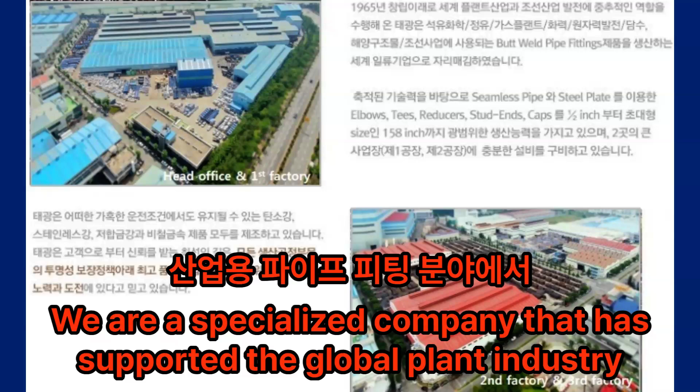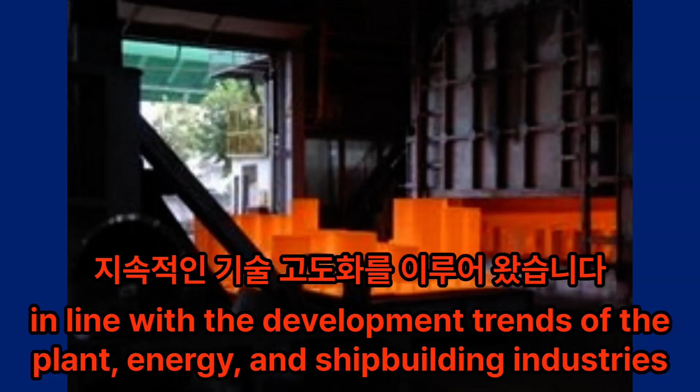We are a specialized company that has supported the global plant industry based on the world's largest production infrastructure and proven manufacturing technology in the industrial pipe fitting sector. Since its establishment in 1965, Taekwang has continuously advanced its technology centered around butt weld pipe fittings, a core component of piping systems, in line with the development trends of the plant, energy, and shipbuilding industries.

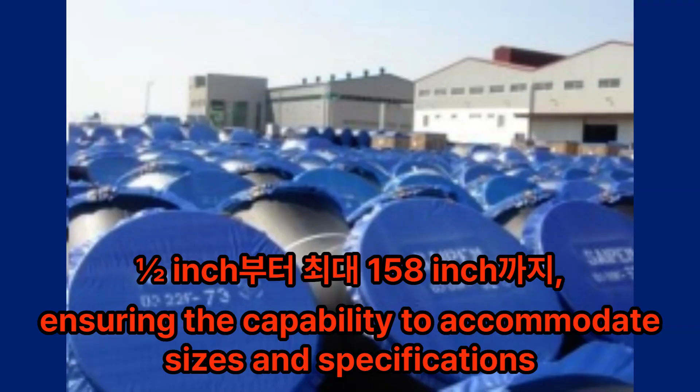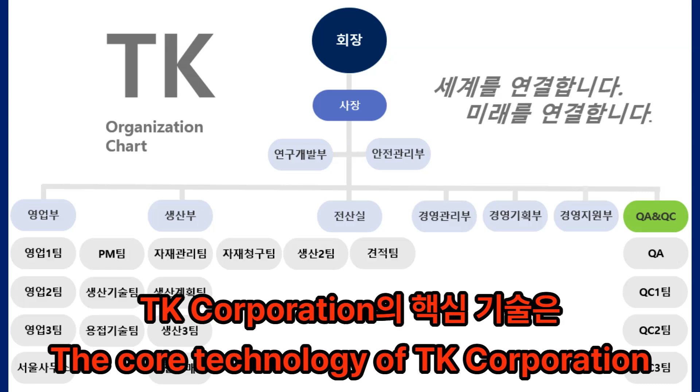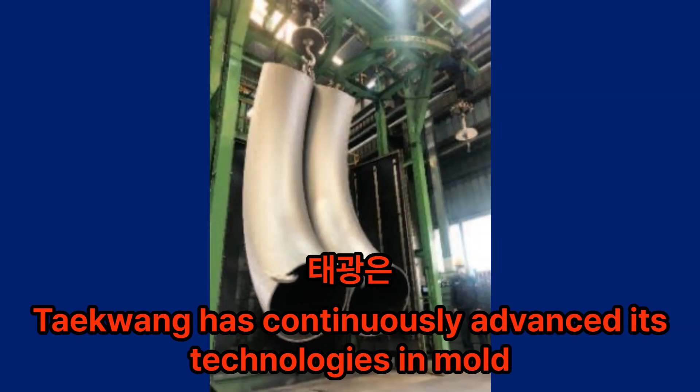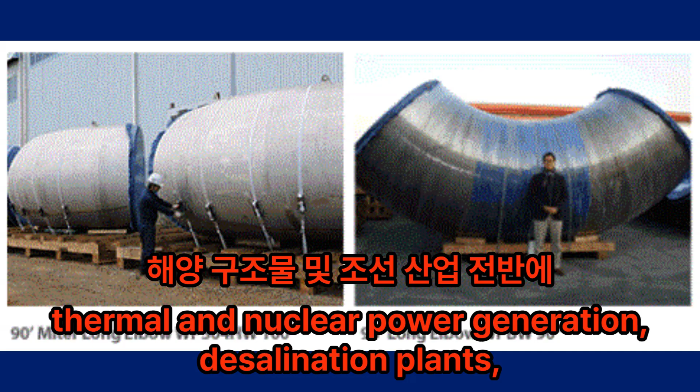This structure simultaneously meets the specification, consistency, and quality stability required in large plants and mega projects. The core technology of TK Corporation is the manufacturing technology for extra-large fittings. To respond to the trend of large-scale and high pressure in the plant industry, Taekwang has continuously advanced its technologies in mold, forming, welding, heat treatment, and dimensional control, establishing a product portfolio applicable to petrochemical refining gas plants, thermal and nuclear power generation, desalination plants, offshore structures, and the shipbuilding industry as a whole.

TK Corporation possesses the capability to handle design, manufacturing, and verification in a one-stop manner in the fields of segmentable elbow, induction bend, and barred T.

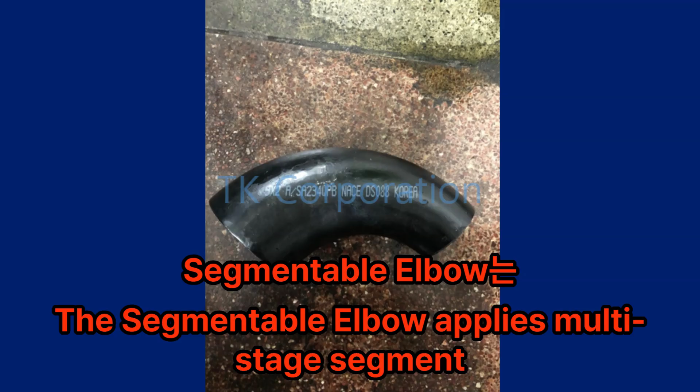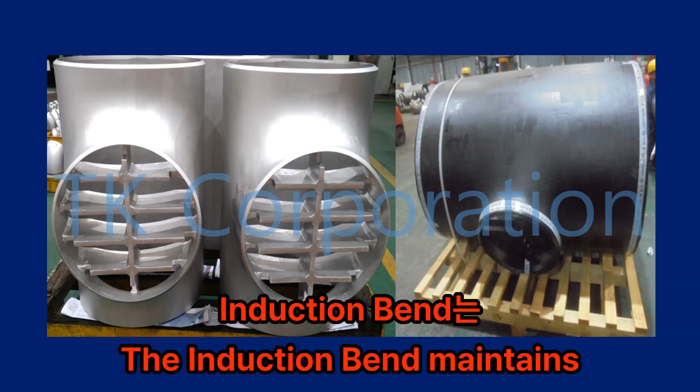The segmentable elbow applies multi-stage segment design and welding technology to ensure the curvature, precision, and structural stability required for large-diameter pipelines. The induction bend maintains uniformity and durability of material properties based on high-temperature induction heating processes and is applicable across all segments of upstream, midstream, and downstream.

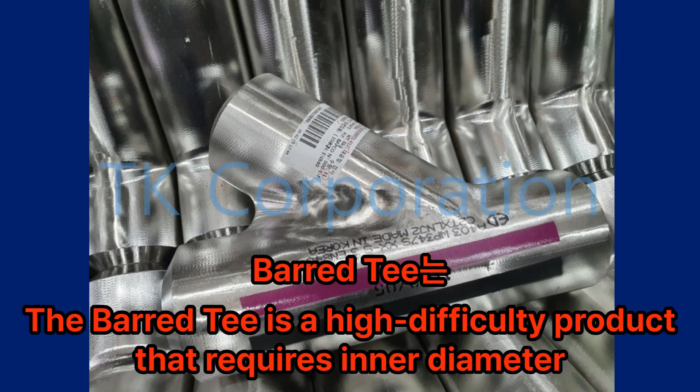The barred Tee is a high-difficulty product that requires inner diameter control and structural reinforcement design, considering intelligent pig operations, and it is custom designed to meet customer conditions based on international pressure, vessel, and piping codes.

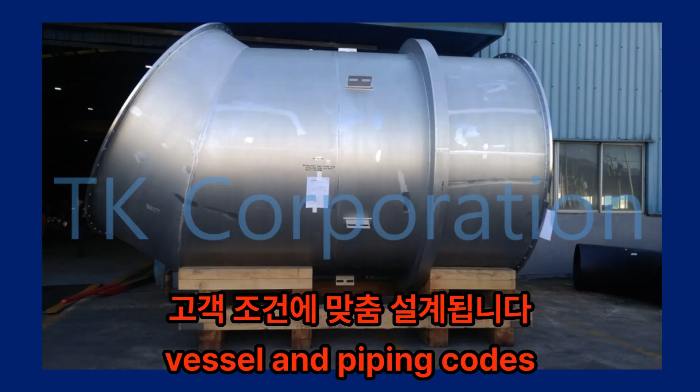TK Corporation has secured one of the world's largest fitting production capacities based on a manufacturing site of 482,645 square meters through a facility structure capable of mass-producing key items such as elbows, tees, reducers, and caps. We achieve stable delivery times and quality, even in large EPC projects and diverse, high-volume order environments.

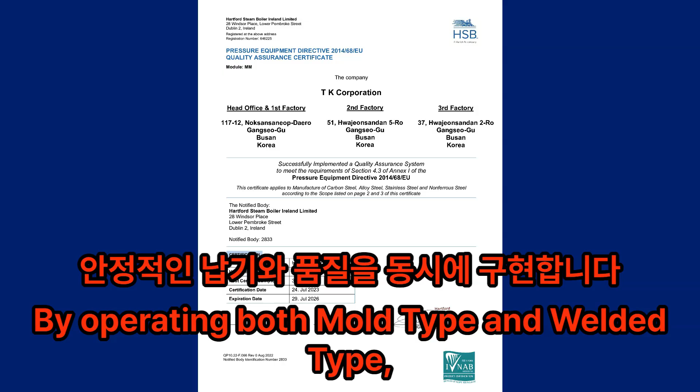By operating both mold type and welded type, we have established a production system that can flexibly respond to product shape, thickness, and material requirements.

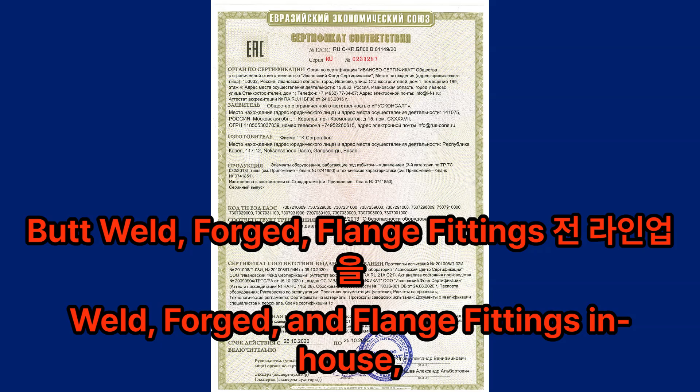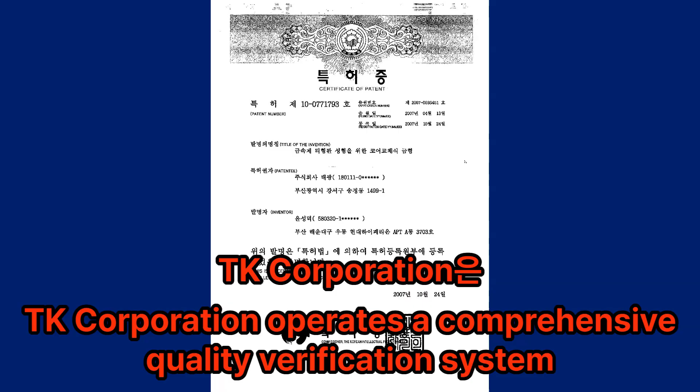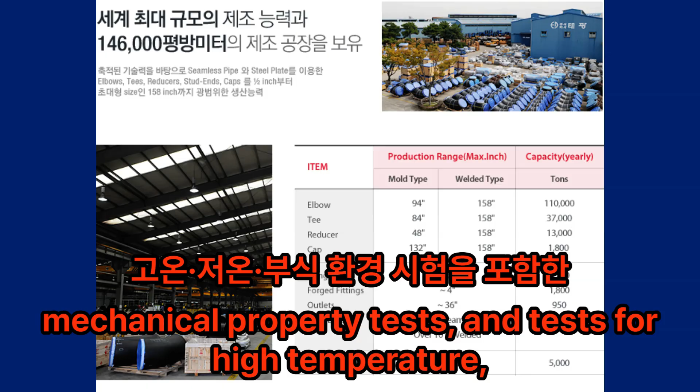TK Corporation operates a comprehensive quality verification system for all processes from raw material receipt to finished product shipment. We have established comprehensive testing facilities in-house, including chemical composition analysis, mechanical property tests, and tests for high temperature, low temperature, and corrosive environments, allowing us to perform tests required by international standards such as ASME, API, and ASTM without outsourcing. This reflects Taekwang's quality philosophy, aimed at securing long-term reliability even under extreme driving conditions.

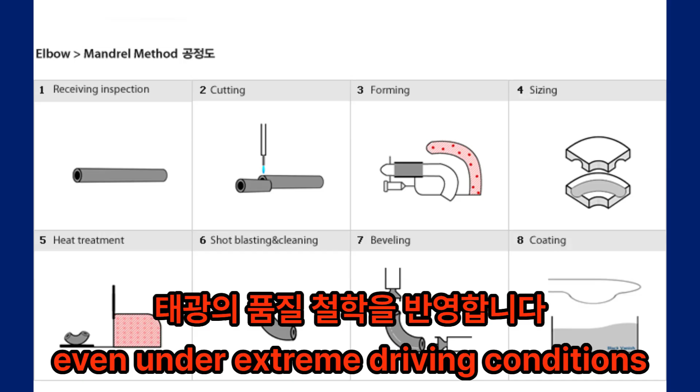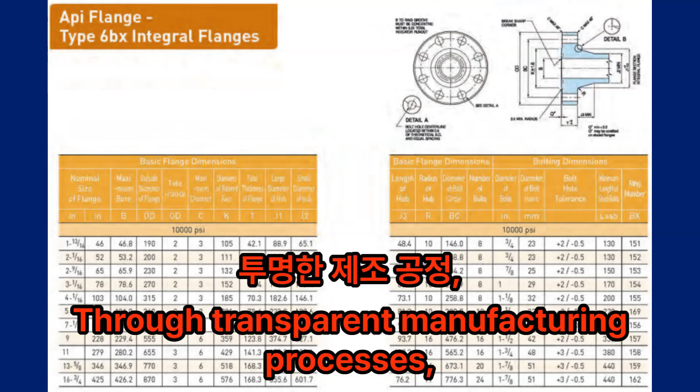TK Corporation aims to be a technical partner that designs the reliability of piping systems rather than just a supplier of products. Through transparent manufacturing processes, verifiable quality data, and continuous technological innovation, TK Corporation is chosen as a long-term partner in the global plant, energy, and shipbuilding industries.

Technology that connects the flow of industry. TK Corporation, Taekwang.